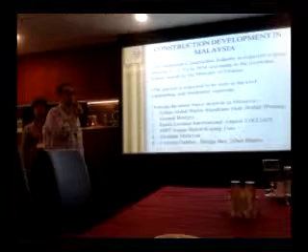So the highlights are the latest projects in Malaysia this year. The first one is the Sultan Abdul Halim Muazzam Shah Bridge, which is the Penang's second bridge. Second, of course, the controversial Kuala Lumpur International Airport 2, which is the second terminal of KLIA. Then the third one is the MRT Sungai Buloh Kajang line, the first MRT in Malaysia. Iskandar Malaysia, a development in the southern region next to Singapore. And on the residential segment, it's Country Garden in Johor Bahru.

Okay, we go for the first one. The first one is the Sultan Abdul Halim Muazzam Shah Bridge, also called the Penang Second Bridge. It's a dual carriageway toll bridge in Penang. It connects Bandar Cassia, or known also as Batu Kawan in Seberang Perai on the mainland of Peninsular Malaysia, with Batu Maung on the island. The total length of the bridge is about 24 kilometers, which is longer than the first bridge, and the length over water is about 16.9 kilometers.

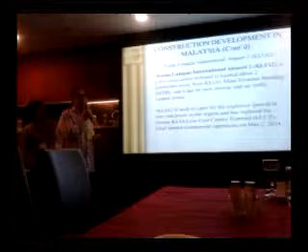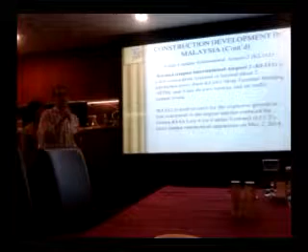The next one is our Kuala Lumpur International Airport 2, KLIA 2. This is the first official new low-cost carrier terminal in KLIA. So if you land via AirAsia in KLIA, you will land at this airport. And if you have a connecting flight in KLIA 2, I suggest please come as late as possible, as it is interconnected to a shopping mall. So you get lost in the shopping mall and you won't make it to the gate.

So KLIA 2 is built to cater for the explosive growth in low-cost travel, at a cost of approximately 4 billion, about 1.3 billion USD. KLIA 2 has a built-up area of 257,000 square meters with 68 departure gates, 8 remote stands, 80 aero bridges, plus a retail space of 35,000 square meters. So this is very huge, with a total of 160 retail and food and beverage outlets throughout the main terminal.

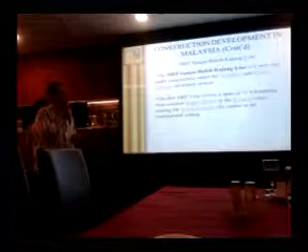The third one is the MRT Sungai Buloh Kajang line. The MRT Sungai Buloh Kajang line is a new line under construction under the Selangor and KL rail transit system. This is the first MRT line, which will cover a span of 51 kilometers from Sungai Buloh in Selangor to Kajang town, passing Kuala Lumpur city centre in an underground setting.

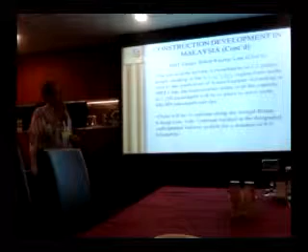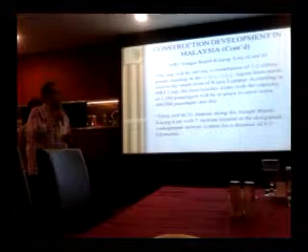It will serve around 1.2 million people residing in the Klang Valley. According to MRT Corp, the 4-coach train will have a capacity of 1,000 to 1,200 passengers, to serve at least 400,000 passengers per day. There will be 31 stations across these 51 kilometers, with 7 stations located underground.

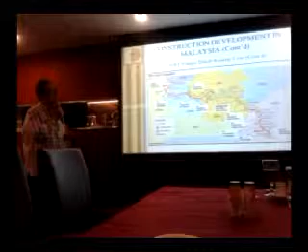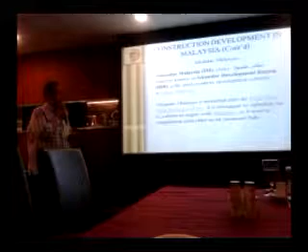Iskandar Malaysia is a development in the Southern Development Corridor in Johor, Malaysia, which is adjacent to Singapore. Iskandar Malaysia is modeled after the Pearl River Delta Economic Zone. So it is envisaged to capitalize on its current synergies with Singapore as it aims to complement each other as an economic hub.

The development region is about 2,200 square kilometers, covering the city of Johor Bahru and the joint towns. This is the coverage of Iskandar Malaysia.

This is Singapore. These are currently the Johor Bahru City Centre, which is part of Iskandar Malaysia, but they will transfer the administration to Nusajaya.

These are the Western Gate development, Eastern Gate, basically the east and west, and Senai Skudai is where the airport is. They will turn the Senai airport into an international airport. This is the residential development by Country Garden from China.

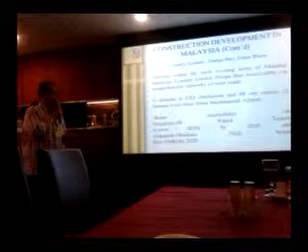It is only 5 minutes to the CIQ checkpoint in JB Centre, 25 minutes away from Senai International Airport. There is a project, the Singapore-JB Rapid Transit System (RTS), by 2018, which will give better accessibility to Singapore.

What they offer is a 5-star seafront garden oasis in Johor Bahru, with 5-star service for most of the residential apartments, along with some low-rise apartments as well.

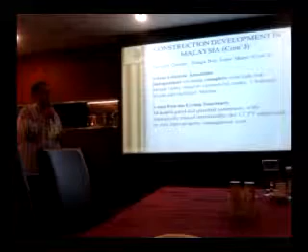With amenities, it is an integrated township because it is a gated township. They called this place the Lido Beach last time, but now they call it Danga Bay. This picture shows the entrance.

This is Johor Bahru, and this is the straits between Malaysia and Singapore. Singapore is down here, so you are facing Singapore. These are the amenities there, and they have commercials as well.

These are the outlook trends for 2014, where in Malaysia we are looking at these things: first is the industrialized building system, secondly BIM, and of course green technologies. For today's presentation, we will touch on commercial green building.

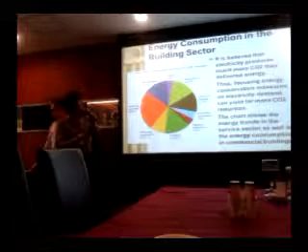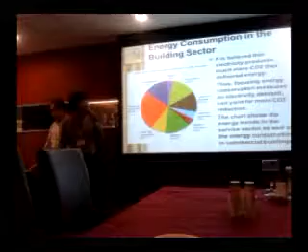In terms of energy usage, it's obvious that electricity and transport—I think this one is mainly used by our construction sector—is 24.25%.

This is a breakdown of energy usage in commercial buildings throughout the world. I think it's quite a similar pattern. As you can see, heating, ventilation, lighting, cooling (air conditioning), and office equipment take up a big chunk of almost 80%, so there's a lot of fat to cut in terms of energy reduction.

I'd like to come back to what I mentioned just now about the government green building project, called PTM. This is the first green building for a government administrative building, and it's GBI certified, which is the Green Building Index in Malaysia.

This is the facts of the project: it was completed in 2007, and these are all the project parameters. Just to highlight, this building is very energy efficient. From the planning stage, it only uses one-third of the energy that other commercial buildings in our country previously used, so it's very, very energy saving.

This is from the outside, and this is the inside—this is the office space. There are 41 rooms.

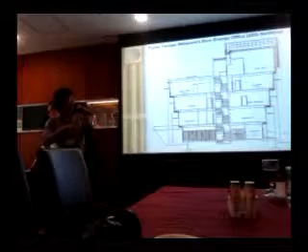This shows the building cut section and the solar panels on top.

It also uses this so-called diffuse light system to save on artificial lighting, and it has a lot of these mirror light shelves.

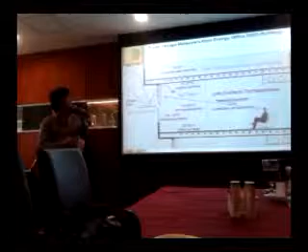These are the cooling tubes under the floor slab, where cold water is pumped during the nighttime to bring down the temperature. You can see the temperature is around 23 degrees.

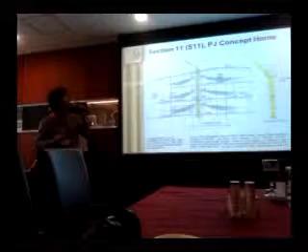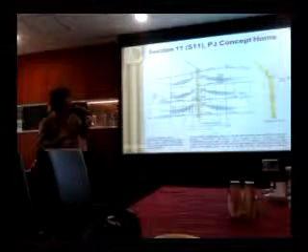This is another thing used in our country. They call it a light shelf or light box. The light is channeled through mirrors and then diffused out to the rooms.

Therefore, the middle of the building, which is the darkest, can be lighted through this style of system. They call it light boxes.

These are the PV panels. This is the big one, the main roof. This is the secondary roof. This is the atrium, which uses a glass-to-glass monocrystalline, and this is the car porch.

Just keep in mind there's A, B, C, D. There are 4 different panels, each with a different capacity and different manufacturer.

The main roof uses this 47.28 polycrystalline, made in Japan by Mitsubishi.

The second one is the secondary roof. It's a 6.08 kWp, manufactured by IBG from Germany, called Kaneka or something like that. And this is the energy rating, 64, and how many numbers of it?

The first one uses 394, and this one uses 95, and the total area is 370,107 meters square.

This is panel A and panel B. This is panel C and D. Panel C uses the mono glass-to-glass.

This is a special type of PV panel which allows light to go through it while at the same time generating electricity. However, its energy output is much lower.

It's 183. This one is used at the car porch. The power rating is 180, and it uses 64 and 100 and something.

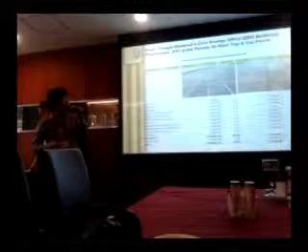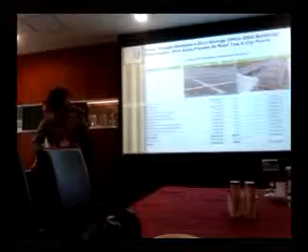Okay, this is the glass-to-glass PV panel, C and D. The cost of C is pretty high because it's a small area. It's almost more than half of panel A already. And the cost distribution, the highest is 64% under the PV modules. The car porch is also quite high, 791.

Okay, this one is to do with the power rating. So it's measured based on ringgit invested against how many kilowatts kWp generated by the solar panels. As you can see, the total cost of the A roof panel is 967K, and the secondary roof is 147K. So the cost per kWp for the A roof is 20.4 thousand, and the B roof is 24.2 thousand ringgit.

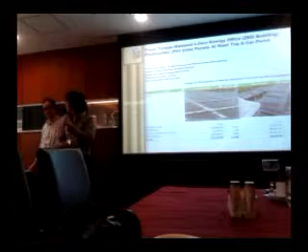Okay, this is the C roof. The total invested cost for the PV system is 252K, and the cost RM per kWp is 21,000. And the D roof is 220K, and the cost is 8,000 only.

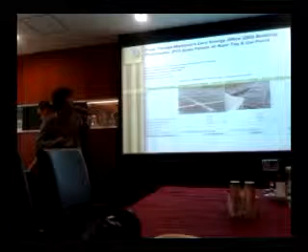Okay, this calculates the percentage of the kilowatt actually generated. You can see this A roof has an excess of 5% only, which is 3.5 kWp, and the second roof is 6.4 kWp. And the atrium roof has the least performance. It's actually not generating enough electricity. It's in the negative. And this one generates 2.8.

Hold on, can you go back first?

Okay, so as you can see, the total energy demand for the whole building is 290. The total power generated from the solar panel is around 240. So there's an excess of about 50 kWp, and it's sold back to the national grid, and it has 86,000 per year. And therefore, the payback period is around 35 years based on the 3 million invested.

These are the photos of the different types of PV panels. Okay, another type is the glazing. I just want to highlight to you the different types of glazing. Based on the normal high-rise building, they're using this tempered float heat soak glass. The cost for a project, quite a sizable project, is around 28 million, and it's about 6.24% of the whole project cost.

And the second step up is to use this laminated blue anneal float glass with PVB, and clear anneal heat soak low E glass. The cost is 31.98 million and is increased by 14%.